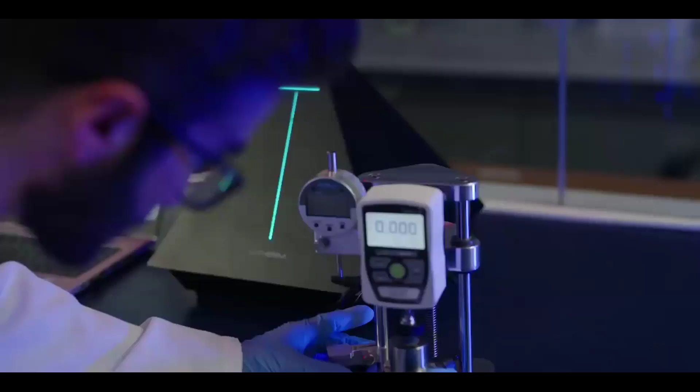C-Therm's purpose is to simplify thermal conductivity testing for the materials of tomorrow. Since 2007, we have emerged as the global leader in test instrumentation. Our core strength in thermal conductivity is built on the now industry standard Trident instrument and broadened through strategic partnerships with Rigaku and Metravib, providing one of the most dynamic portfolios in thermal and mechanical analysis.

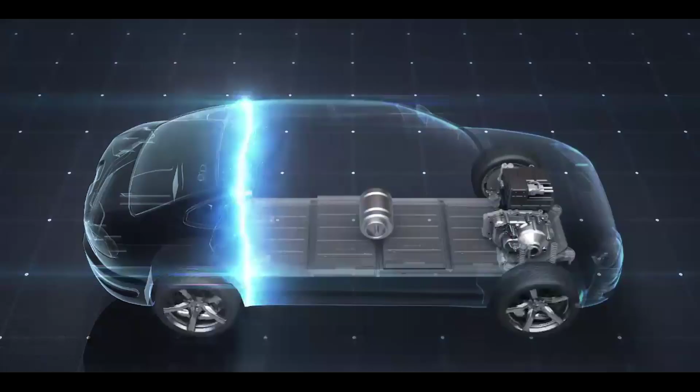Thermal conductivity describes a material's ability to transfer heat energy through conduction. In electronics, whether you're developing a smartphone, aircraft, or electric vehicle battery pack, the thermal conductivity of the materials is a major factor in the overall thermal management of the device. In other applications, like metal hydrides that are used as hydrogen storage media in fuel cells, the thermal conductivity impacts the kinetics of hydrogen adsorption.

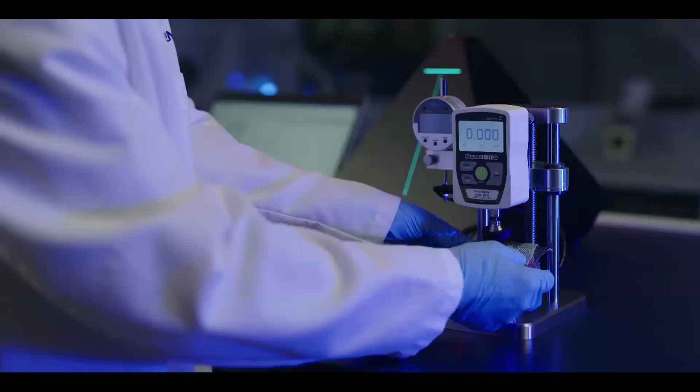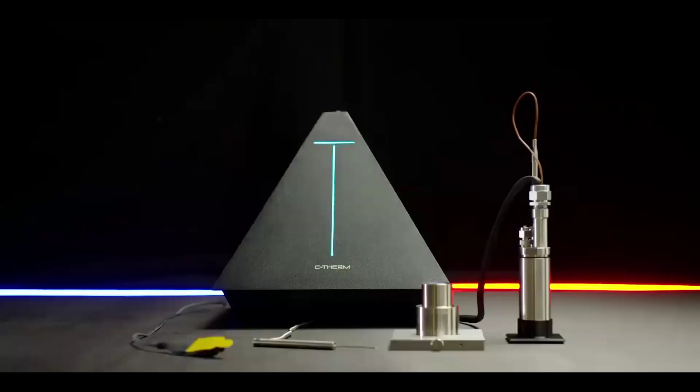The most common mistake we see in industry is applying a good method of measurement on the wrong type of sample. This is what happens when you're limited to a single tool and are facing a variety of sample formats. The Trident was designed to provide researchers with multiple options on a single instrument platform, so you always have the right tool for the job. It's been a huge success. Leaders like NASA, Adidas, Intel, Kimberly-Clark, Lucid Motors, and universities around the world choose C-Therm analysis tools and the support we provide.

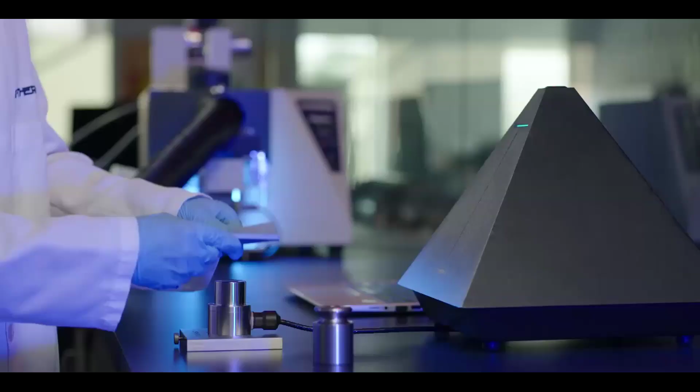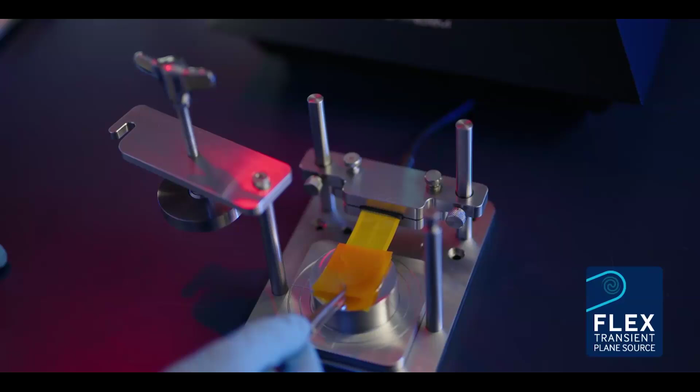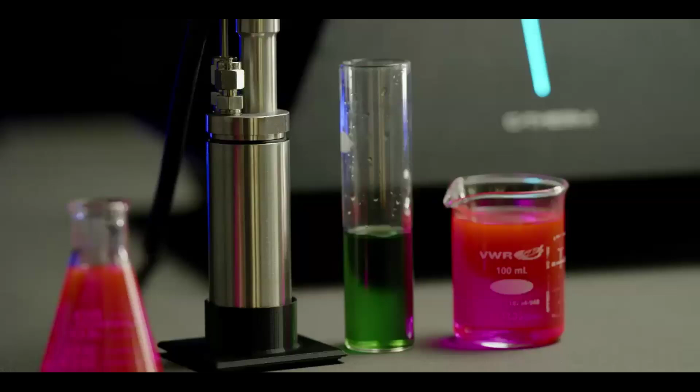C-Therm customers get access to the most advanced transient methods and are able to test under real-world application conditions, including humidity, temperature, or pressure. C-Therm's patented MTPS single-sided sensor is the fastest and easiest way to measure thermal conductivity. The Flex TPS is brilliant for more challenging applications and testing anisotropic and thin film samples. Our needle probe offers robustness for polymer melts. And the new THW is great for low viscosity fluids like engine coolants.

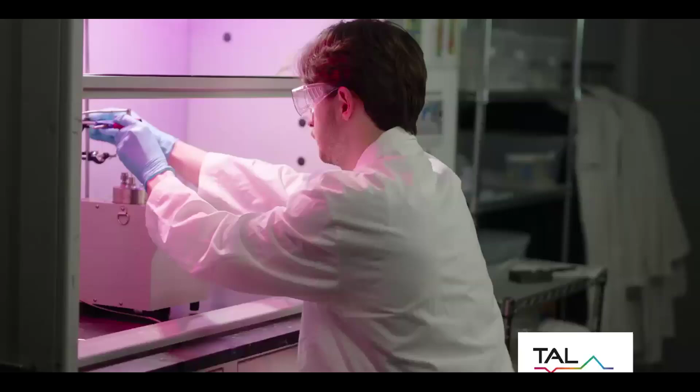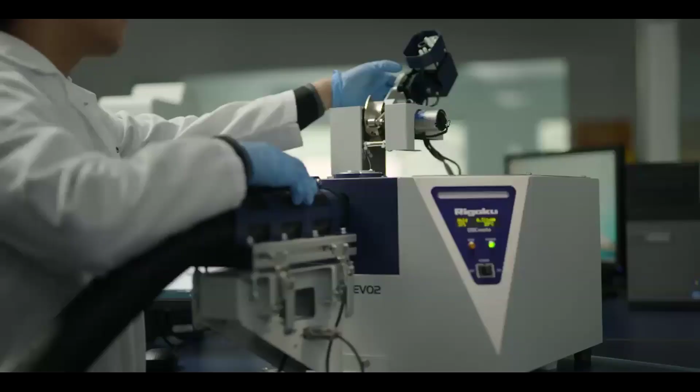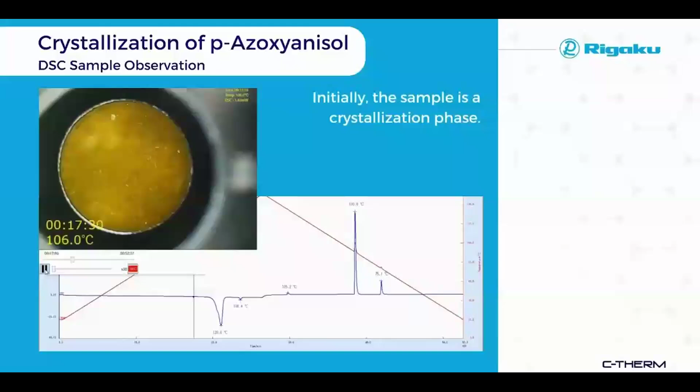Not every client's ready to bring testing in-house, so we also offer industry-leading testing services here at Thermal Analysis Labs. C-Therm's highly skilled and experienced team provides access to the most advanced characterization tools for thermal properties and the expertise to make sense of the test results. For example, Rigaku's breakthrough sample observation capabilities allow users to video record a sample as it undergoes a heating cycle. When working with an unfamiliar material, you can see phase changes, crystallization, and other phenomena. This is vital for understanding the material and helping tell the story of how it behaves.

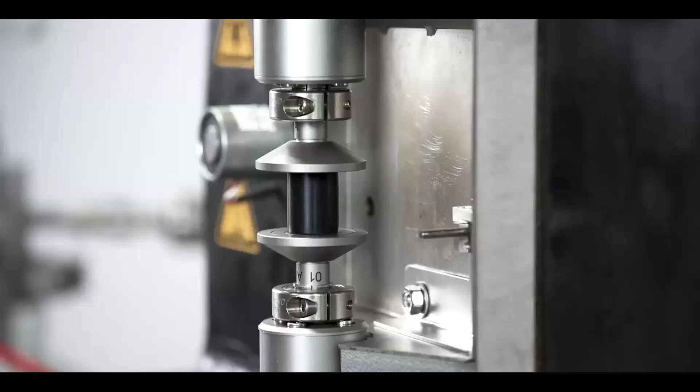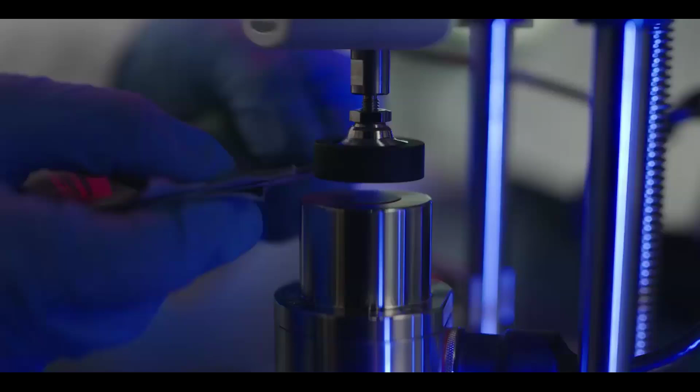Metravib's line of DMA offers the broadest frequency range and the highest force available on the market. This is just one of the reasons it is the standard in the rubber and tire industry. We work with a lot of folks developing different fillers for tires, including carbon black. And due to its sensitivity, the DMA is by far the best method to measure the glass transition point. C-Therm aims to help accelerate material research and improve outcomes driven by better material performance data. Let us help you get the best possible data for your research. Simplifying thermal conductivity.

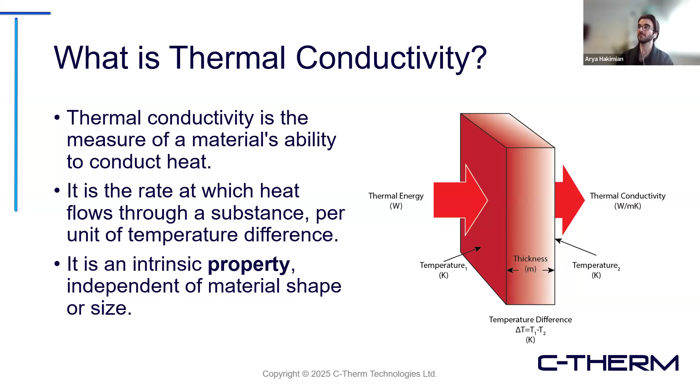Now, of course, if you're densifying the material or changing some other thermophysical properties, that can play a role. But if you took a material A that was 2 millimeters thick, and then you took that same material but it was 10 millimeters thick, it will have the same inherent thermal conductivity. Now, what is thermal effusivity? And again, this would be a little more relevant to the bulk of today's session.

So thermal effusivity is sometimes referred to as thermal inertia, but really this defines a material's ability to exchange heat with another body that it's in contact with. There's some neat calculations you can run on the interfacial surface temperature upon contact between two different bodies of different temperatures, different values. But they're related here, right? So your units for thermal conductivity are watts per meter Kelvin. But thermal effusivity, you can see it's equal to the square root of K, so thermal conductivity, density, and heat capacity. So these are related thermal properties. But again, it depends on which application space you're in, and one might be a little more relevant to talk about than the other.

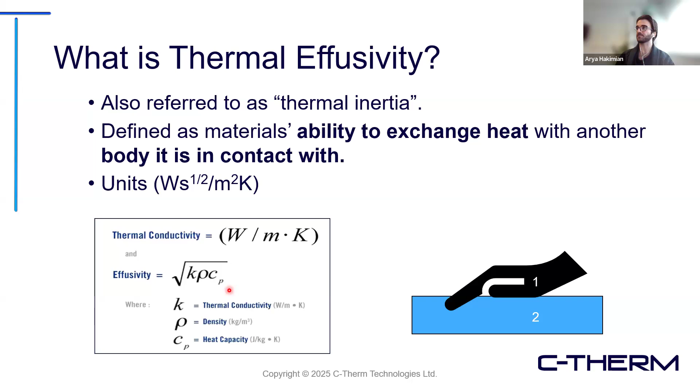So thermal effusivity is somewhat newer for some folks, I find. So this is a neat little thought experiment that we do with some folks to really just help illustrate the point and what it is. So I'll use this example here. We have a desk, right? Let's say this is real wood. I'm assuming it's a composite, but let's say this is real wood, and then there's the metal bars on the side. Which one would you say is colder, right? If you put your hand on the wood, just from that perceived feel, and then right after that, you go to touch the metal.

I would say what you're likely to find is that the metal is going to feel cooler. But technically speaking, this desk just in a room, assuming there's no heat source or cooling system directly on the part, they're technically at the same temperature. So the temperature is the same, but the perceived feel is different. And again, we can relate that to effusivity. And that's kind of the core idea behind what we're doing here in quantifying performance of things like textiles that are in contact with the human skin. So textile 1 versus textile 2 having different thermal properties can give different sensations or perceived feels, which can be correlated to comfort.

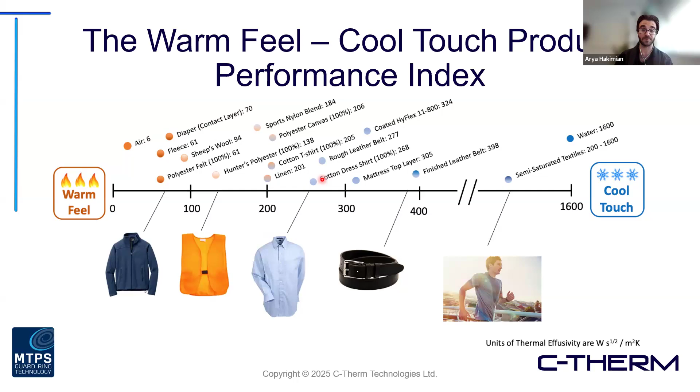Whereas in the summer months, of course, or if you're an athlete going to the gym and exerting yourself, you want to stay cool. Maybe using some of these higher effusivity materials can be beneficial. So that's the idea of where this is all playing out in terms of why these properties are relevant and where they come into play in research and, of course, in industry as well.

So effusivity, amongst other things, can also be really useful in claims validation. You'll see different things, mattresses, footwear, shoes and apparel, shirts. If there's notes that say feel cool to the touch, keep feet cool, cool all night, things like this can actually be backed up with the measurement of thermal effusivity.

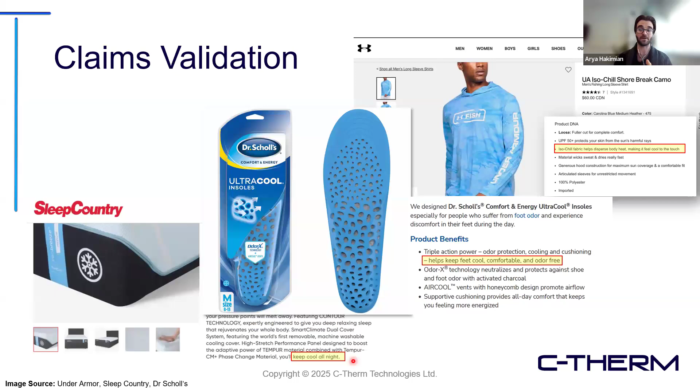There are some groups that we work with that internally have a certain threshold which they require their vendors' materials to hit in terms of an effusivity value to be brought into specific product lines. So whether it's for material sourcing, marketing claim validation, or internal R&D, this can be quite relevant and very useful depending on the scenario or the case that you're looking at.

This one here is a little example of backing up some claims. There was a group a while back, Arctik, they had a PCM cooling technology that they were applying to materials, and it was applying a more cooling sensation when in contact with the body. This was very valuable to them, especially if they were able to get in front of a client or a prospect, bring them examples, one that's treated and one that's not treated, and they could feel the difference. Obviously it's really easy to sell that.

But a couple things can be subjective. There's some amount of cooler feeling. If I use your product A that does this amount of cooling, how much is the difference really? And also, are you able to get in front of your client, especially with everything recently? Everyone knows past years have gone quite virtual. Sometimes it's not as accessible to go directly to someone physically. You're doing a lot of online meetings, and how can we show that?

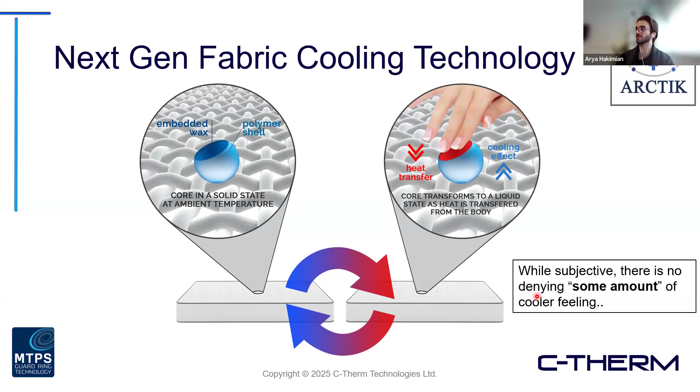So this was basically one of the reasons we did some testing here. This is just a very small data set to illustrate the point, but you can see one is noted to be an interlock fabric. The other one was a non-woven high loft material, both treated on the left and untreated on the right.

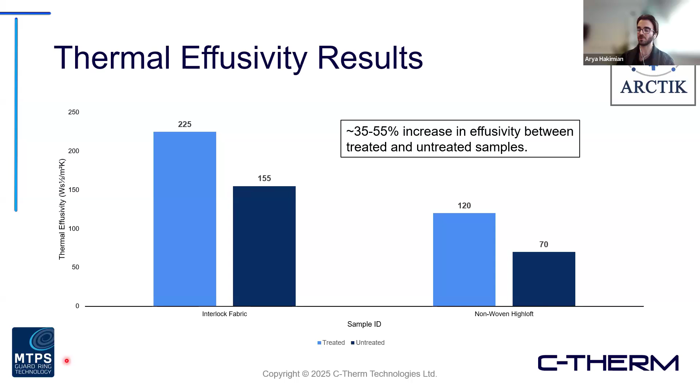And what we're able to show here is, one, visually show there is a notable difference here, but also really quantify by how much. So again, what was previously subjective or required you to get in front of someone physically, you can now back up some of these claims through actual material testing to help really solidify your point. So yeah, this is just one example here. This was some testing done on the MTPS, and we'll go into that method here, actually, I believe up next.

So when you're looking at your sample size requirements, there's a few other considerations, but a big one is that we can at least cover the surface of the sensor. So it doesn't have to be circular in nature. It can be a square. It can be much wider. You don't need to cut it to size, but we do need to make sure we are making contact and covering that active zone. That'll be really, I'd say, step number 1 to be able to use this method and get valid, reliable, and repeatable data.

Yeah, like I almost made the slide deck myself. I knew it was up next.

So ASTM D7984. This is the standard, I'll read it out, standard test method for measurement of thermal effusivity of fabrics using a modified transient plane source MTPS instrument. So, a couple things to note here. The MTPS, again, being a proprietary sensor design, to conform to this standard, there are certain requirements part of the MTPS method inherently. So if you are looking to do testing according to this standard for thermal effusivity, it is done with the MTPS. There are also some additional guidelines and requirements to conform to the specifics of the standard, things like temperature requirements, humidity, the conditioning of the samples, etc.

But overall, what is involved in your setup for this? You, of course, have your MTPS shown in this diagram here, your sample over top. This is a graphic representing a CTA, or compression test accessory, something we'll talk about here, the influence of compression and where that can play a role in characterization. This is then connected to the controller unit, so that'd be your Trident, and then connected to your laptop or computer. So pretty straightforward setup there.

Yeah, the overarching message would be, if you're looking to have ASTM D7984 specifically, especially if you're looking for a group perhaps to do this testing for you, just make sure that they do have access to the MTPS method.

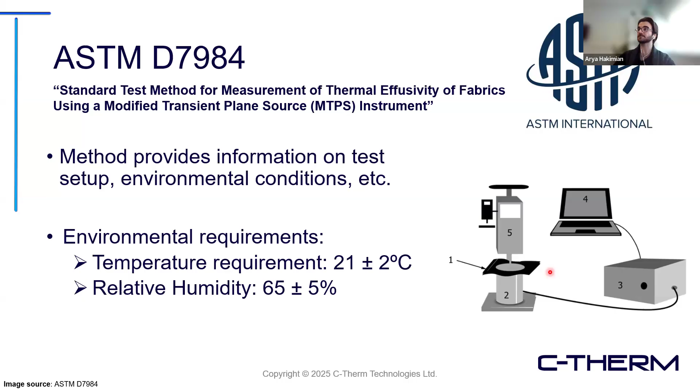Now, that being said, I do want to talk about one of the other methods here, which is the more traditional transient plane source, or TPS. And traditionally, in years past, the TPS wasn't really the method we would talk about, especially for effusivity. Still for textiles, a little, not so much, but for effusivity.

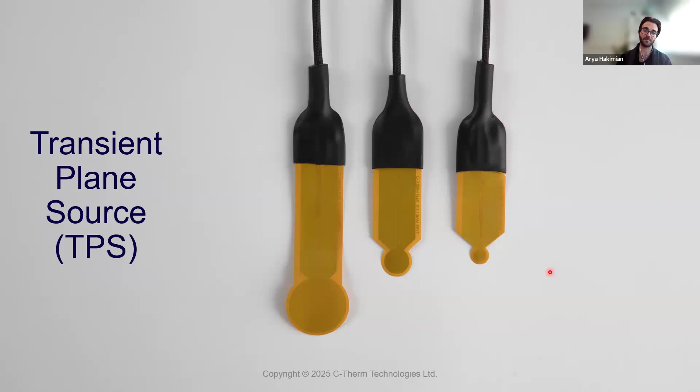But there's been some developments within the ISO that I do want to bring up. It's something that different groups that offer TPS, as well as ourselves, have begun offering. But there are certain considerations I just want to flag around this method in general. Not going to go deep into the background behind this one. Just wanted to really flag some verbiage in the ISO standard.

So when we're looking at thermal effusivity, ISO 22007. The -2 variant is the TPS usage for testing thermal conductivity and diffusivity of a variety of materials, polymers, foams, metals, etc. But the -7 variant came out at the end of 2023. So, it's been out there about a year now, as a way of getting effusivity from your TPS.

Now, the way this is done, the TPS provides you conductivity and diffusivity with some other things, and it provides a calculated effusivity here. But a few notes. The error on the measurement is a little bit higher than that of the MTPS for the effusivity measurement. 10% here versus about 5% on MTPS.

And there is some work that can be done in TPS in a single-sided operation mode. By default, it's a double-sided method. So you usually place a sample on the top and bottom side. You create a stack. Again, it's a little bit different than the MTPS requirements. But there's some general verbiage here that ideally you're going to use the double-sided method because that's what gives you your best possible output. But for a lot of the effusivity side of things, there's discussion around the single-sided setup.

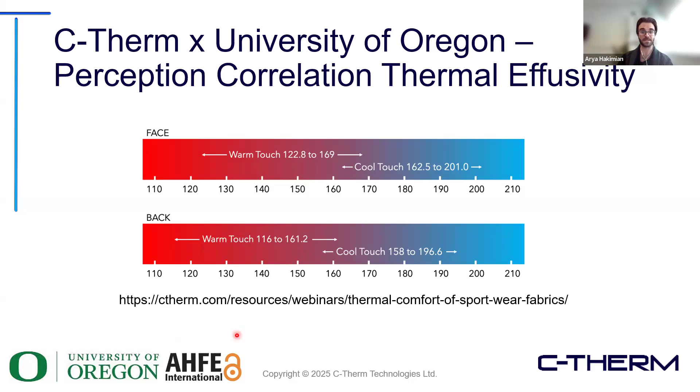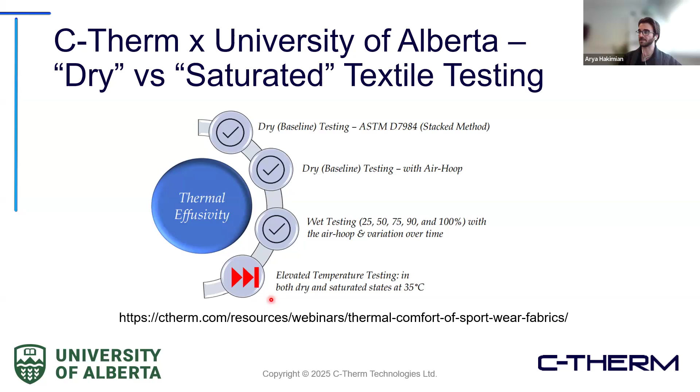All right, going into some varying application examples here. Just want to do some quick hits on stuff that might be relevant or things that we come across quite a bit and pass that knowledge along. First one here is understanding the influence of compression. Especially important if you're dealing with a very lofty material. If you're applying a force, squishing something down, what's happening here? Well, your sample thickness goes down.

I mentioned earlier the intrinsic property, but this is different because in these scenarios, it's not just a thinner sample; you're actually changing the density of the material. This has an impact on the thermal resistance and, conversely, the thermal conductivity and effusivity. If we zoom right in on a system, you see this fluffy solid, but inside of that is a lot of air. Air is a very strong insulator. It has a very low effusivity, very low conductivity value. So the more air that's present in a system, the lower it will be.

Compress that down. Well, what are we doing? We're putting the material in closer contact with each other, pushing that air out, and again, tweaking and changing the effective performance of the material.

An example you could think about in this case is, let's say, a winter jacket, the big puffy winter jackets. That's filled with some materials, maybe similar to this. When you see the jacket, it's contained within the envelope of the material of the jacket, but it's quite lofted. It's not pushed and squished down all the way. And because of that, it keeps you warm. It's keeping some of that heat in.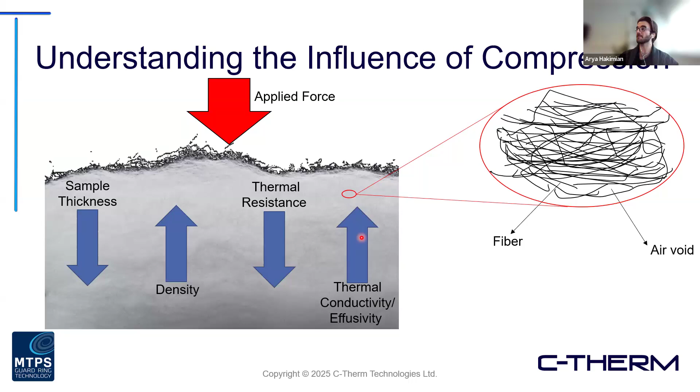Yeah, here, just a quick example. This was a similar lofted sample under different applied force loads. And again, generally the rule of thumb: you apply more force, you're compressing it down more. That's going to bump up those effective values of the material.

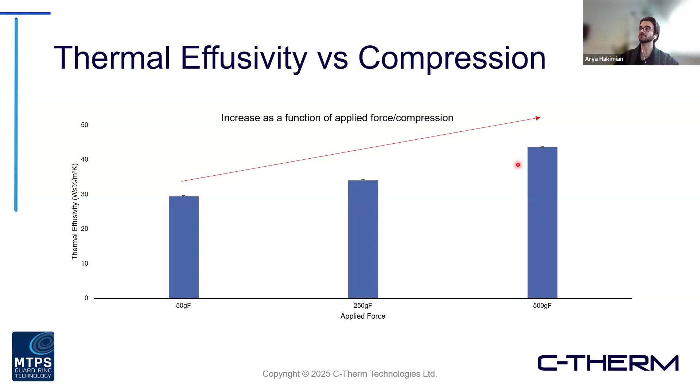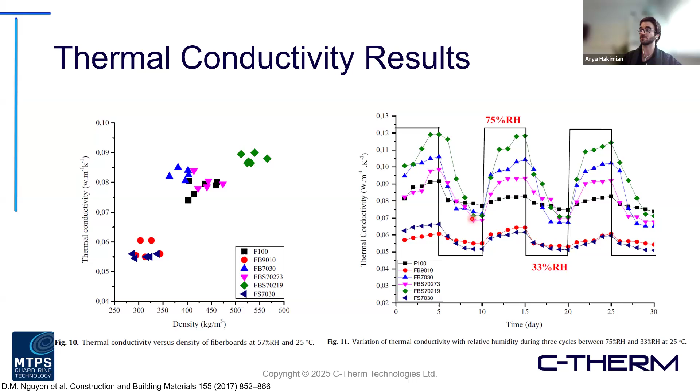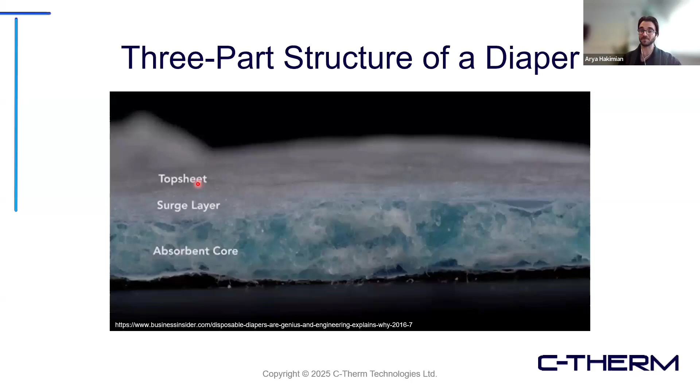Now, what you may be interested in is, how do different diapers perform against each other? And what would that overall sensation be? Parents out there, if you've got a baby and they're crying, you'd probably do anything to make that stop, right? So providing you ways to make them more comfortable might be a really great option here. The example that we're showing is testing a no-name brand versus one of the leading brands.

We started with dry testing, so just the dry material popped on top of the sensor, and they were quite comparable, really. I'd call this a fairly negligible difference. But when you go into that wetted state, now this is pre-development of the SOP that we worked on with the University of Alberta, this might have been a little more crude, just saturating the sample and then popping it on the sensor immediately for testing. But in either case, it was kept the same for both samples, and we showed that upon initial wetting and then testing, that no-name brand kept things feeling much cooler.

So you could imagine, I'm assuming part of that three-component structure of the diaper wasn't pulling that liquid away to the absorbent core as fast, so it made a cooler feeling sensation, because water will really pump up that effusivity value. But in this scenario, being cold in that sense is less desirable. You want to pull that away to get them back to feeling as close as you can get to that dry state, right?

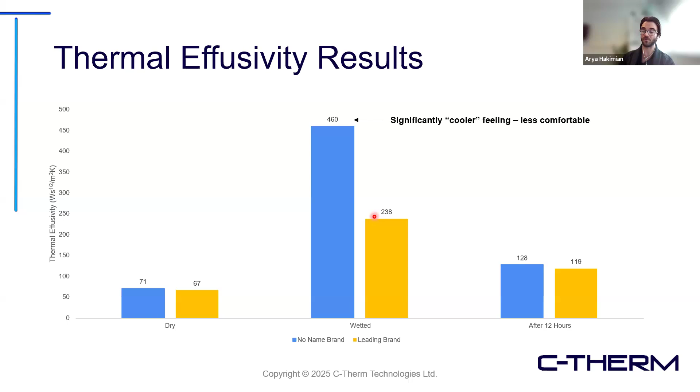I won't do the full breakdown here, but basically they were doing various concentrations of our two starting materials and introducing that onto a silver fabric. Through the process here, you can see, we get to the end, and you have a zinc-coated silver fabric, essentially. But depending on the ratio of the starting products here, this would infer some differences in the type of zinc oxide that was produced on the fabric, and they were looking to see if that played a role in the overall thermal performance of those coated systems. And it turns out it did.

So the Z1 and Z2 formed a crystal structure in the 101 direction, and they were higher. They ended up boosting that performance compared to the Z3, which was the 100 direction. And as we can see, these two actually went the opposite route that they were looking for. But then the third variant there did actually show a performance, I'll say, increase, because the conductivity and effusivity decreased for this specific application.

Interesting work. It's a textile, it's a fabric, not something I think that's being used in necessarily a gym shirt or a pair of shorts, but it's textiles. Interesting work here with the MTPS, looking at the performance of those different material treatments.

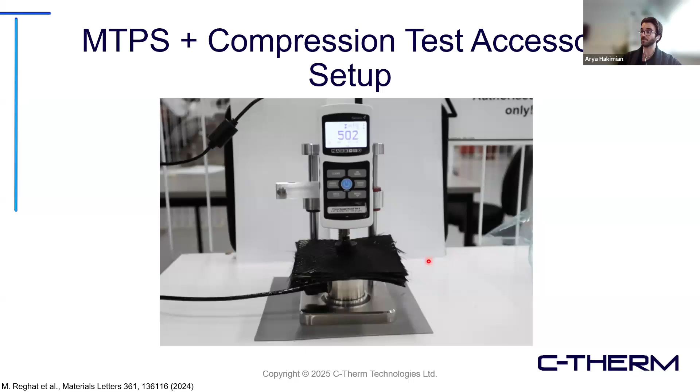The next one here, titled Through Thickness Thermal Conductivity Characterization of Dry Carbon Fiber Fabrics. So again, this was a recent publication from last year using the MTPS. This one was really purely focused around the conductivity side of things, but they're looking at these types of carbon fibers in their materials. So in the paper here, you can see a nice little picture of the setup that was used. This is, again, that CTA, compression test accessory. We have the MTPS below it here, and then the different carbon fibers that they were looking to assess the performance of.

I will mention that the MTPS, the TPS, and TLS methods do have options available for some of that more novel testing, doing things under different controlled gas pressures, inert gases, under vacuum, etc. So maybe you are doing some more exotic, novel material testing, and if thermal conductivity is playing a role there, we'd love to have a discussion with you, see if we can support you in any way. It's definitely something that we have a history with, and as you can see just from the numbers here, it can sometimes have quite a big impact on the performance of your system.